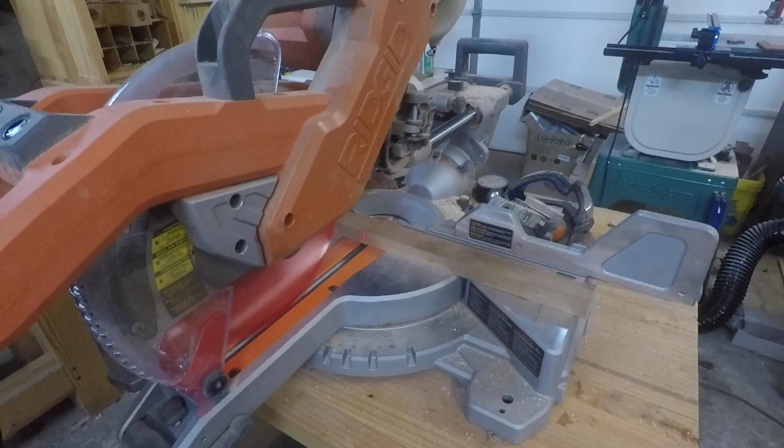So let's get started. Okay, to start, we're going to go ahead and get these all cut to length. I'm going to go for about a 12-inch board on this, so I'll cut these up into 12-inch lengths, starting with the cherry. I'm then going to take the ebony and make some thin slices out of it. And as a contrasting stripe, I'm also going to make some thin slices of the maple as well.

Okay, so the next thing we want to do is arrange our wood in a nice pattern. What I'm going to go for in this case is an alternating setup, like this, to do something like this. I think that'll give us a nice pleasing line on the box.

Now, one thing you'll notice here is my pieces of ebony are a little short, and I really do want a 3x5, so I'm going to be using this half for the bottom, this half for the top. So if I've got some short pieces like this, what I can do is slide them over to where they're in the middle. Then when I glue this up, I'll just be aware that I'm not going to cut in this center area right here, so I can avoid that spot and still have a nice solid line for the rest of it.

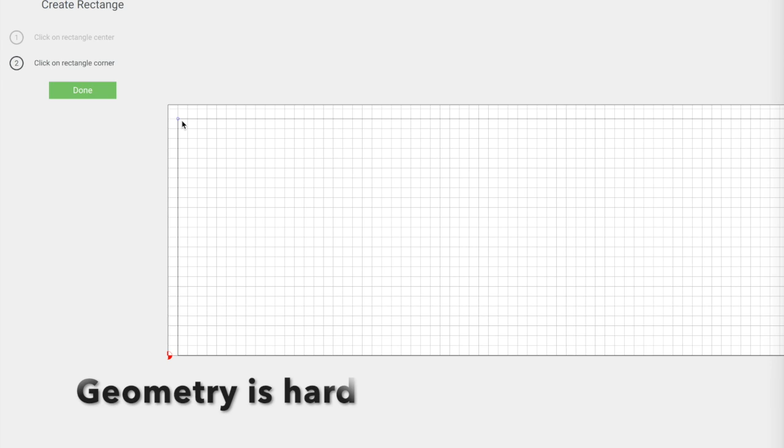Reset our view. Okay, so now I need to create a square, or a rectangle rather, that is the same size as my stock. I'll push it up here to 12.5 and 5, and then I'm just going to center that here. Now for me it's also easier, I'm going to come back here to my job setup, and I'll do this from the center because I've got it centered on my machine, and that way it's going to use that for my 0 point. But all I really need with this is the rectangle covering the full area.

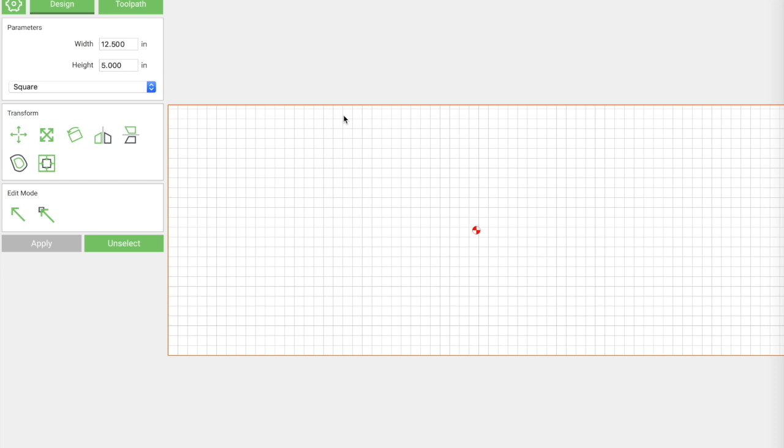Now for the tool path, all I have to do is a contour. I'm going to choose my big bit. I've entered this into the library before because I've used it for flattening things. We're going to go a little bit faster than that because we don't need to go that slow. 40. We're going to be taking off very, very little material here, so I'm fine ramping this up fairly high. I'm going to actually take that to 50.

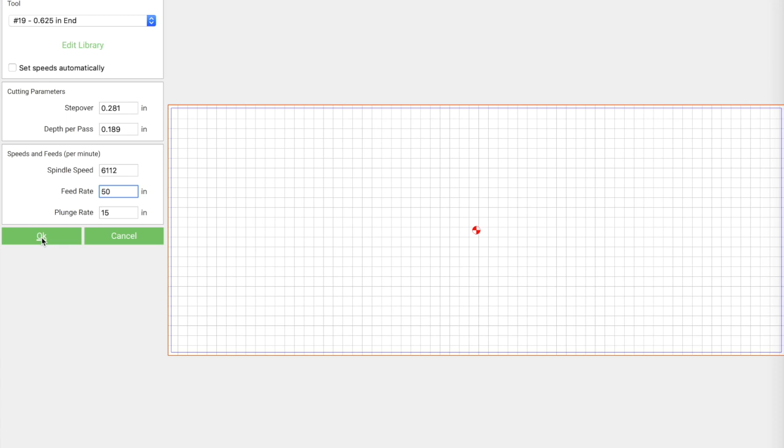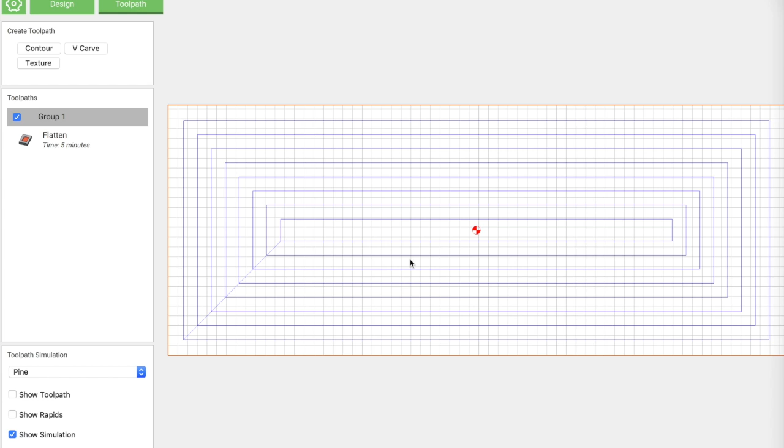But again, we're probably only going to be taking off like 1 millimeter of material each time. So 1 millimeter is about 0.04 inches, and we're going to pocket, and it looks like we get good coverage there, and I'm just going to call this flatten. Okay, and what we'll do each time is it will pocket this area, and if we still need to go down further, we'll re-zero our Z height and do another pass of this. It should go fairly quickly. You can probably even increase the speed further than what I have, but that's the basics for this. So this will create our flattening pass, and we should be good to go and just save our G-code.

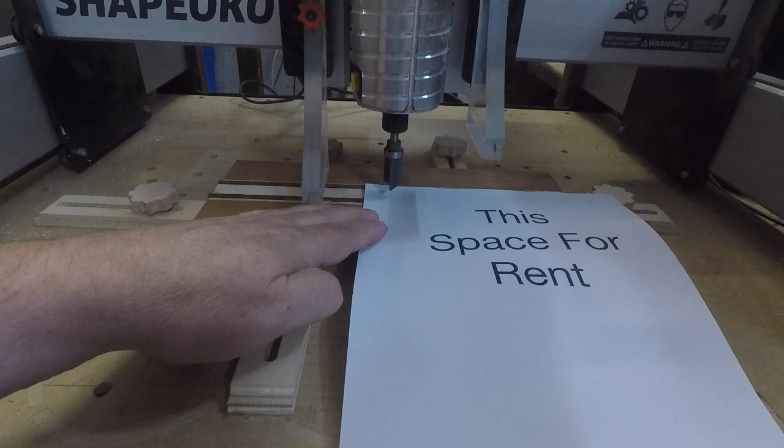Okay, so we've got our board lined up, and you want to pick the highest spot. So I'm going to grab one of these little ridges right here, and that's what I want to zero to. So at least for our first pass, let's go ahead and drop this down. All right, 4. There, that seems to have it. Set 0. Done. Bring it back up.

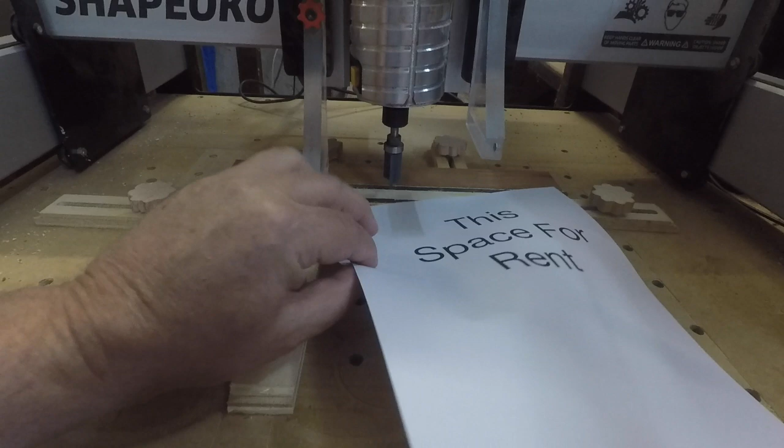Okay, so now we should be ready to go. Our position is going to be here on the center, and it's built to go a little bit farther beyond the edges and a little bit farther beyond these edges, so it should catch the whole thing. I'm going to go ahead and put the dust collection on because this is going to be a bit of a pain.

Okay, so that's our first pass done. We've still got a few high spots and some glue squeeze out, so I'm going to run one more pass. I'll also nudge it slightly to make sure I get all the way to the edges. But you don't want to do this too fast—don't take more than about 1 millimeter off at a time. Just take your time and get it right. We'll do one more pass, then flip it and do the other side.

Okay, now we've done our second pass on the other side, and you can see we have a nice flat board here. This will be great for cutting our box. You might want to do a little sanding to remove some ridges from the step over, but other than that, this should be easy even if you don't have a planer set up—just use the router to flatten things out.

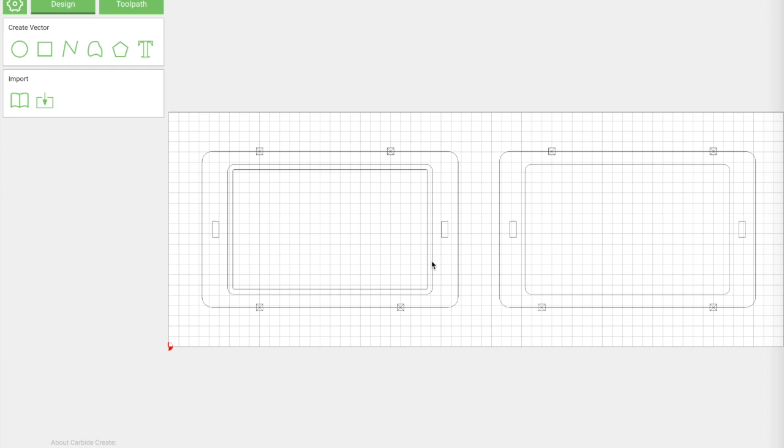So here's our box design, and I'll go over this briefly. If you need more information, check out the 3-part box series on this channel. The basics are: there's a cutout around the edge—this is the bottom, this is the top. These two pieces form a lip that fits inside this one, which is where the two boxes join together. Then there's a pocket here and here to give us space to store things in. These little rectangles are slots for the magnets I put in the box.

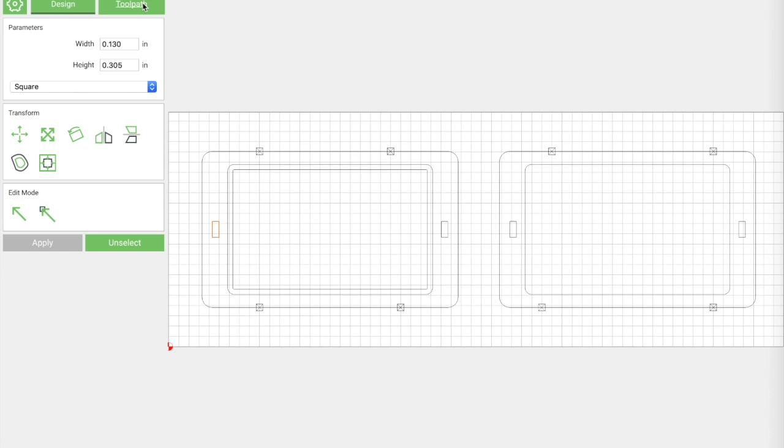Let's take a look at the simulation so you can see this a little better. If you look at the toolpath, I've got my magnets, my pockets, and kind of an upper pocket here. This actually makes more sense when you see the simulation, so let's take a quick look at that.

So the cutout—you'll notice you've got this tiny little lip here. This lip is what mates it to this piece over here. And again, these are just our magnet holes—I'm going to slot some 1/4-inch magnets down in those to help keep this together. The lip is really short, about a little less than 1/8 of an inch—it's mainly there for alignment. The magnets will hold things on, but this lip keeps the lid from sliding off. So that's essentially what our box is going to look like.

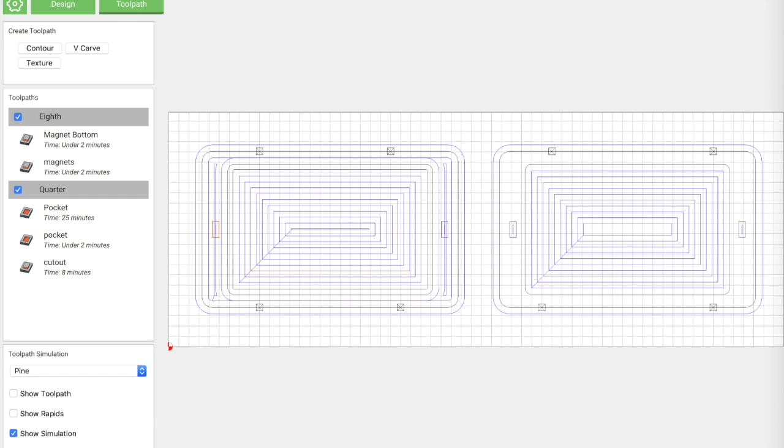That seems to have everything together. You'll notice I've split this into the 1/4-inch operations and the 1/8-inch ones. You'll also notice the magnets are split into 2 passes, because the magnets on the bottom are going to be a little deeper than the ones on top. If we look at the simulation, I can show you why: when we cut this lip out, we're doing a pocket pass around all of this, which means there's going to be about 1/8 of an inch difference between this height and this height.

So when I cut my magnet pieces, it's going to have to go down further. Since those are going in first, I'm cutting my 1/8-inch stuff first. They'll go a little bit deeper, about 1/8 of an inch deeper than the others. So that's why those are cut in two passes.

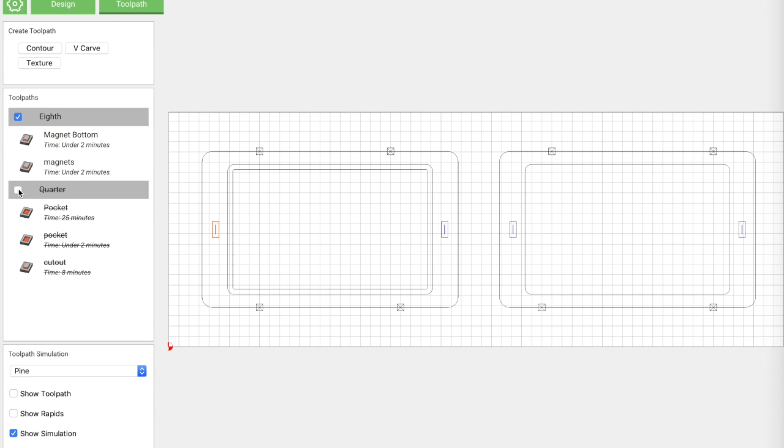But by grouping these in this way, I can go ahead and turn one set off, save my G-code for all my 1/8-inch stuff, then turn the 1/8 inch off, turn the 1/4 back on, and save the G-code for the 1/4-inch stuff. That way I've got my two separate files I need to make the passes on this box. So let's go ahead and do some carving.

Okay, I have things set up and ready to go. I'm going to leave my dust collection off right now while I do this 1/8 cut, because it's just for my magnets, and I want to make sure that when it comes down, it's centered in between here, because that'll tell me whether or not the rest of my design is going to be centered the way I want. So I'm going to leave the dust collection off for right now and just do the 1/8 inch, and that should tell me whether or not I'm centered with enough time to go ahead and save it if there's something wrong.

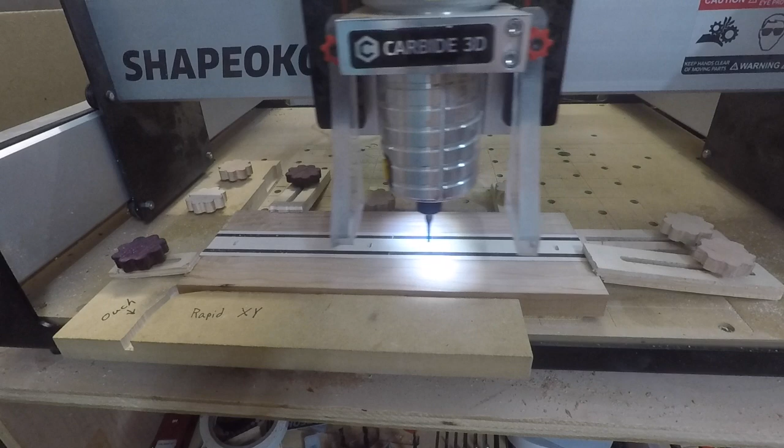Looks like I got things pretty well centered up on this, and hopefully that will do just fine.

Okay, we're set up now for our 1/4 inch, and we definitely want some dust collection for this one. So we're going to go ahead and do our last pass on this. Make sure everything's down nice and firm, and away we go.

Okay, I think that looks pretty good. Let's go ahead and take this over to the bandsaw and cut these guys out and see how everything fits together.

Okay, I need to do a little bit of sanding to get everything to fit correctly together, but on the whole it looks like it's lined up pretty well, and I just need to sand the lip down a little bit to get everything fitting flush, but I think that's going to look pretty good. And put some finish on it and see what it turns out like.

Alright, a little bit of cleanup. Looks like I did a good match on those. So that's our box. Right now I don't have the magnets or finish on it, but everything looks good. I'm probably going to sand this down a little bit more. I don't need it to fit this tight when I've got the magnets in it. So I'll do a little bit of finish sanding, and then it should be ready to put some finish on it, and we should be good to go.